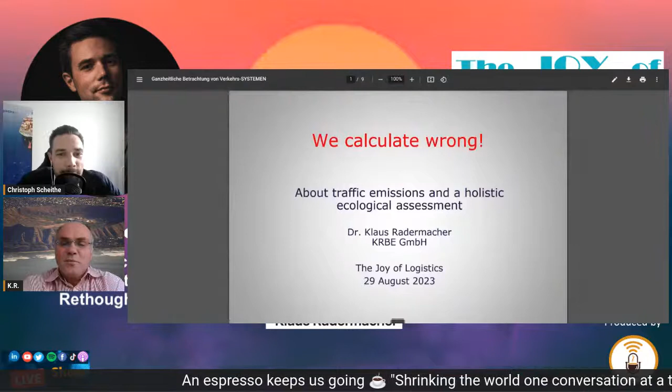This is the headline, the main title: I always claim we calculate wrong. We calculate completely wrong when we talk about emissions - traffic emissions in particular, or mobility emissions - because a holistic ecological assessment takes much more than just looking at the drive energy or propulsion energy.

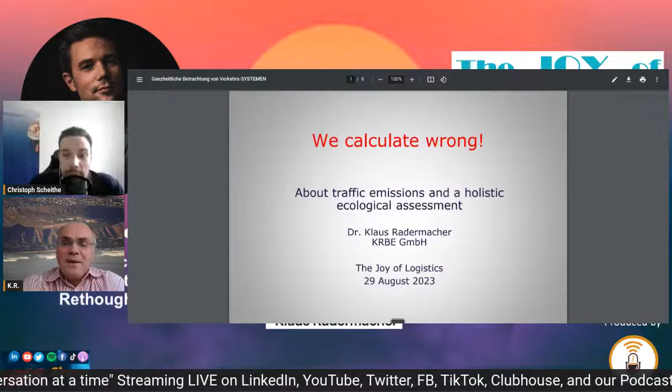This is what we see on the next slide. If we look at transportation or mobility systems in general, we see that there are four primary transportation systems: it's the railroad, it's the road - cars, it's aviation, and it's shipping. These are the four main systems.

Each of these systems requires not only a vehicle and the drive energy or propulsion energy, it also requires a very specific infrastructure. This is pretty much the idea I developed a couple of years back, to come up with this matrix or table. The infrastructure can always be subdivided into a node infrastructure, a path infrastructure, and a control infrastructure. All four systems need that and have that.

The node infrastructure is where we start and terminate any kind of transportation process. When we go by train, we start in a station and the train stops in a station or we get off the train. For an aircraft, it's the airports. And for shipping, it's the ports, the harbors.

For the road, this is where most people have difficulties thinking about node infrastructure. Where is that? There's no designated port for cars - no, there isn't, but there's parking space. Every transportation starts with a parked car and ends with a parked car. So the parking space, whether in a garage, on the street, or in your private driveway, this is the node infrastructure for the road transport system.

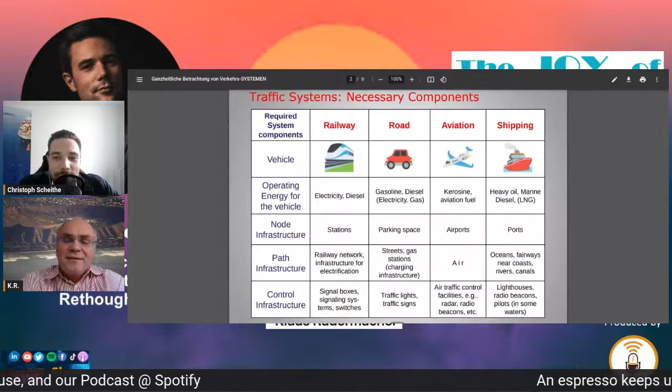Then the very important part is the path infrastructure - that's everything we need between nodes. Because for land-based transportation, railway and road, we have to build this infrastructure - railway networks and the infrastructure for electrification if we want electric trains. For the road system, for cars, we need streets, gas stations, and charging infrastructure so we can keep going.

And now the very interesting part is in aviation - the path infrastructure is air. It's nothing but air.

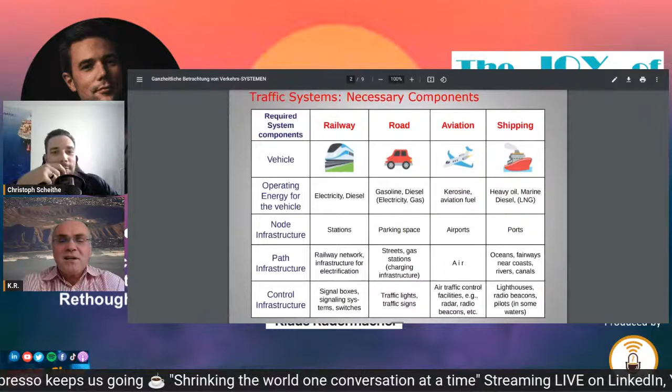We do not need anything but air between two airports, and the air is always there. It does not need to be built, and there is no maintenance required. Somewhat similar in shipping, especially in international oceans—the oceans are there. They do not need to be built, and they do not need to be maintained.

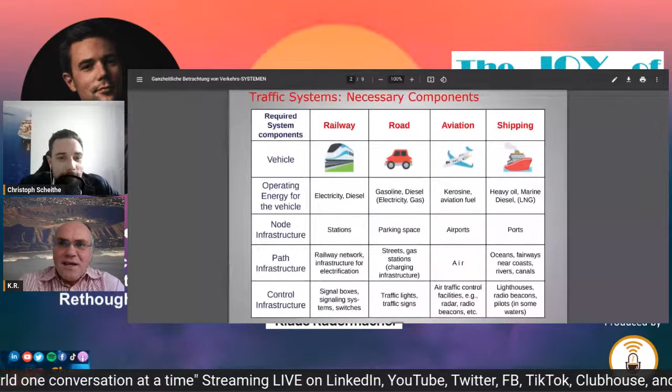Of course, if we are on rivers or even canals, these have to be built, they have to be taken care of, they have to be maintained in order to be deep enough. But for international sea shipping, the oceans are just there. So that's the path infrastructure.

And then the last part, the control infrastructure—very important. Most people do not really think about that. Control infrastructure ensures that several participants in the same system can provide transportation at the same time in a secure and controlled manner, so that cars don't bump into each other, so we have no accidents, so trains don't collide with each other. That is the control infrastructure.

In railway systems, it's the signal boxes, the signal systems, the switches. On the road, it's the traffic lights, the traffic signs. In aviation, it's everything that has to do with air traffic control facilities. And in shipping, yes, there are some lighthouses, radio beacons. Sometimes we even have pilots in some waters, when ships operate in harbors and ports. These pilots actually are part of the control infrastructure.

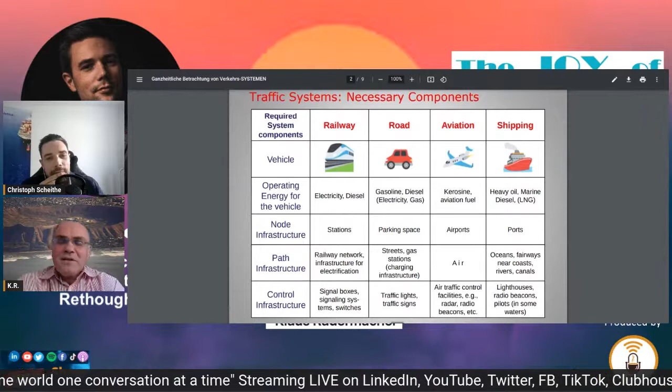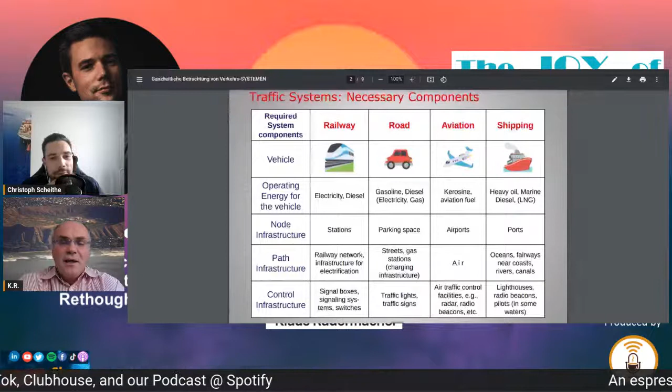But this understanding is really important when you want to have a holistic view of the system. And in order to determine, for example, the carbon dioxide emissions, it is completely insufficient to only look at the operating energy. You have to take the whole system into consideration. What we will see on the next slide is that path infrastructure in particular, but to some extent also node infrastructure, is very intense with regard to certain materials.

This is just a collection of different photos. You see node infrastructure and path infrastructure—I won't go into the details, you can all see that right away. We see train bridges, electrification, and a parking garage. What we have to keep in mind is we see enormous amounts of steel, of concrete with cement, very often a lot of copper when it comes to electrification and catenary wires, but we also see aluminum. All these materials have a dramatic footprint when it comes to CO2.

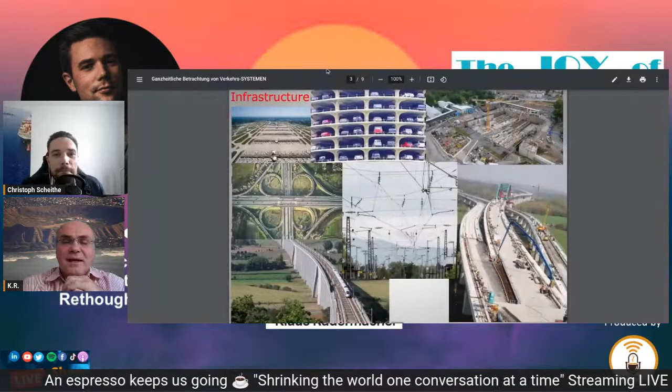That is what we have on the next slide. So here I give you just some numbers. The production of 1 ton of steel generates 2 tons of carbon dioxide just in the coke plant and blast furnace. And just for the railroad track, the rails that trains run on, for 1 kilometer of railroad track we need 120 tons of steel—that's just the track. There is no other steel involved that might be needed for the slab track or anything else.

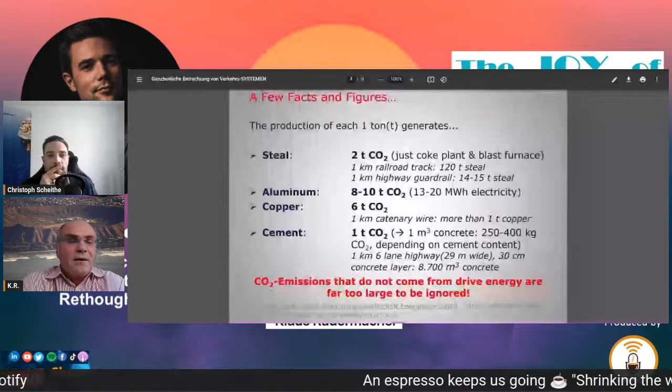And similarly, on a highway, 1 kilometer of guardrail is anywhere between 14 and 15 tons of steel, and 2 tons of carbon dioxide per ton of steel is quite impressive when you look at these numbers. Speaking about aluminum, it gets even worse.

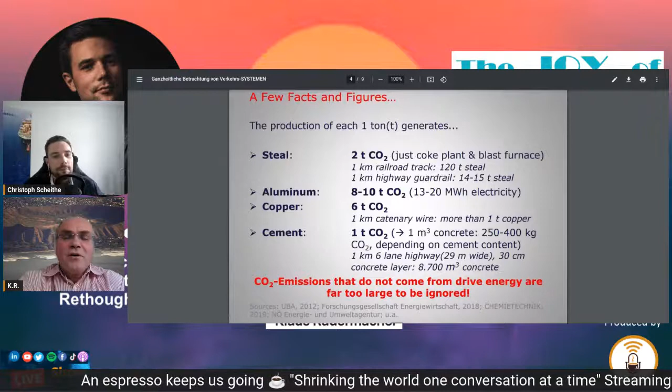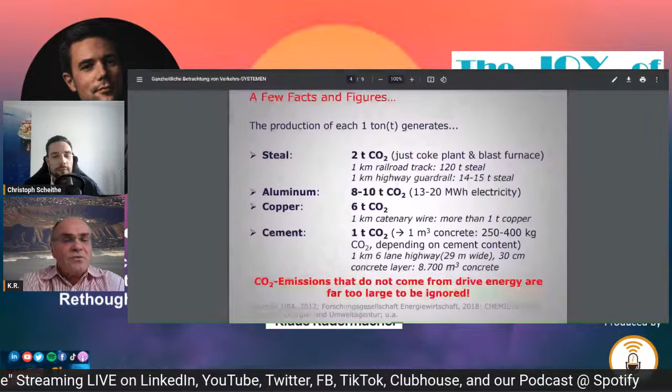Aluminum—I have to admit the number 8 to 10 has quite a range, and that depends on the carbon footprint of your power generation for electricity, because it's very electricity intense. But for 1 ton of aluminum, on average on this planet, we have 8 to 10 tons of carbon dioxide emitted somewhere. Copper is 6 tons or even a little bit more.

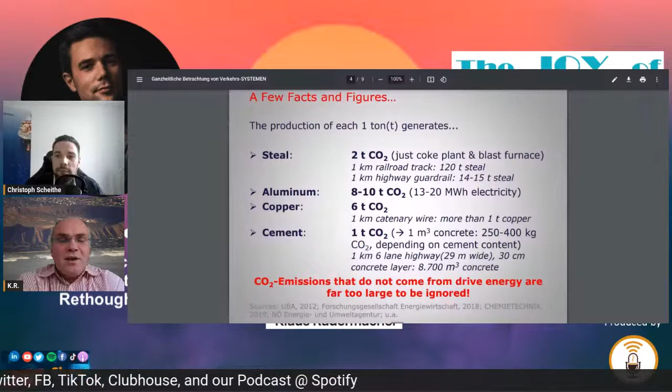And once again, to give you an impression—that catenary wire I already talked about, which hangs above a railroad track, 1 kilometer, if the catenary wire is like it usually is in Germany or in Europe, it's about 120 square millimeters. And if you take 1 kilometer of that, the weight of copper needed is more than 1 ton. To produce 1 ton of copper from copper ore, you emit more than 6 tons of carbon dioxide, and that does not even include the energy required for making the wire—it's just the pure metal.

Cement: 1 ton of cement comes up with 1 ton of carbon dioxide, and depending on how much cement is in the concrete—and you need a lot of concrete when you build roads, especially when it comes to building bridges or even tunnels for trains—we have, for 1 cubic meter, the usual measurement for concrete, anywhere between 250 and 400 kilograms of carbon dioxide.

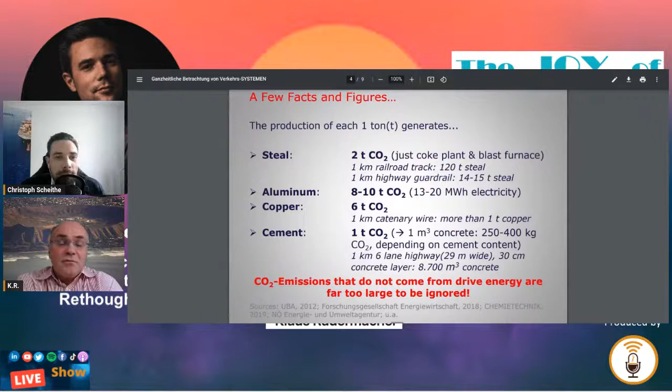My main message is that the carbon dioxide emissions that do not come from the propulsion energy, the drive energy, are far too large to be ignored. That is what we always have to keep in mind. And of course, the question is to what extent can we utilize the infrastructure that was once built. But we have more information on that on the next slides.

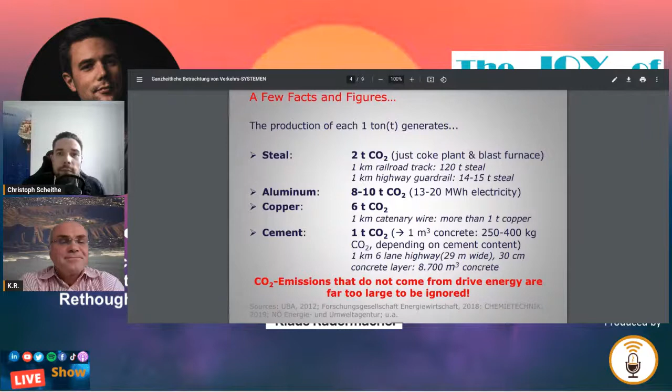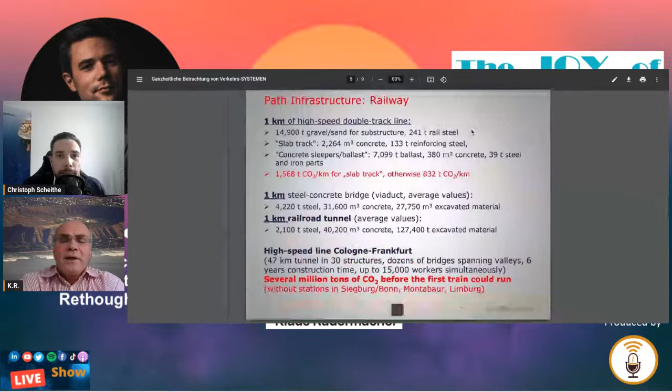I hope this works, keep going. By the way, I just realized there was quite a mistake on that slide, because steel is spelled with double E, not with EA. But I guess you all realized that was a mistake.

So getting back to the railway infrastructure, because at least in Germany and many European countries, taking the train is considered to be very eco-friendly. That's not even true if you only look at the drive energy, but it becomes even less true if you look at what it takes to build the infrastructure.

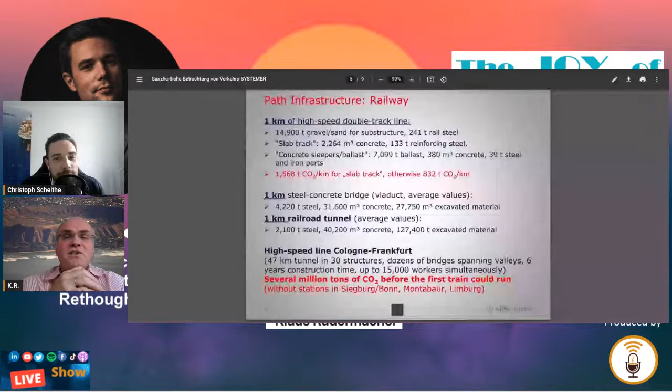For 1 kilometer of high-speed double-track line, so two rails next to each other, one for each direction, you need actually 4 lines of steel rails. The double-track high-speed line requires almost 15,000 tons of gravel or sand for the substructure, and on top of that 241 tons of rail steel.

And if the rails are laid on a so-called slab track, a solid concrete layer where you put the rails on, you need almost 2,300 cubic meters of concrete and 133 tons of reinforcing steel in that slab track.

And in the more classical construction, where you have concrete sleepers on a bed of ballast — ballast being another kind of gravel — you need more than 7,000 tons of ballast, 380 cubic meters of concrete for the concrete sleepers, and then 39 tons of steel and other iron parts to fix the rails on the sleepers and all that.

So this means, if you just look at the CO2 emissions from the production of this material, we're close to 1,600 tons of carbon dioxide per kilometer on a slab track, and about half of that, or a little more, if you go with concrete sleepers and ballast.

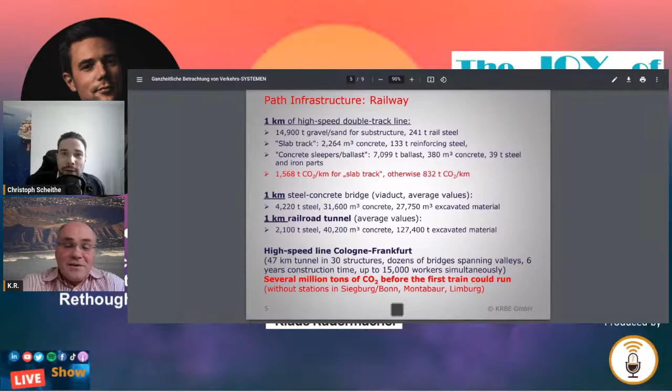Okay, but let's go to the next slide, because this was a very good remark, and I want to have more time for these comments. Let me just pull this up here. There we go.

What I'm saying is thinking mobility differently means we have to reshape our ideas about mobility. For example, what is not really helpful is the form of public transportation as it is provided today. In very large cities, it certainly makes sense to have subway trains running, but in many other cities, if you look throughout the day, most buses, trains, subway trains, or streetcars are not even 20 to 30% filled. They simply do not have the load that would be required to run them efficiently.

We have to think much more about mobility as a service platforms that provide mobility to me when I need it, rather than having to own my own car, which sits in my driveway for 23 hours on average each day and is only used for 1 hour. And when I use it, in most European countries, it's only occupied on average by 1.5 persons - such an inefficient use of individual mobility of cars. So mobility as a service platforms are very important.

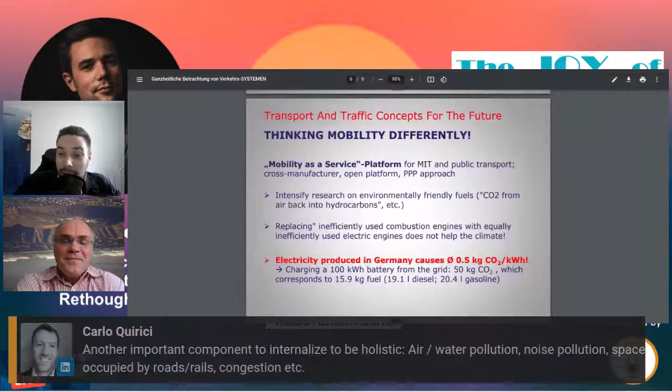But before I move on, I have a quick comment from the audience I want to pull up. Carlo Quirici - I hope I pronounced this correctly, Carlo - says: another important component to internalize to be holistic: air and water pollution, noise pollution, space occupied by roads, rails, congestion, etc. So I think he's pointing out those external effects.

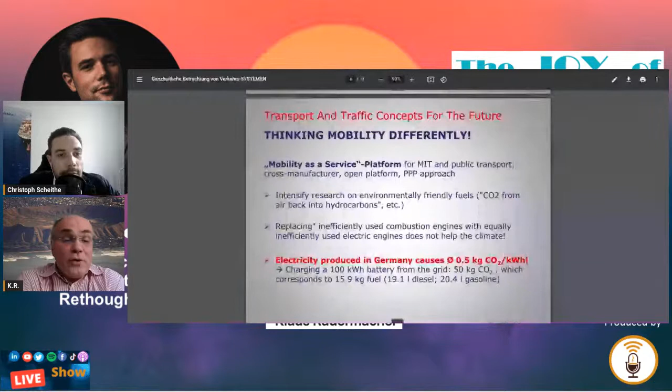Very good, Carlo. I can say you're absolutely right, there's much more than just carbon dioxide. I focused my research on carbon dioxide and then extended it beyond that. Of course space is an issue, noise pollution and vibrations are an issue as well. Water, I have not really looked into in detail, but battery production in particular is very water intense. There are other aspects than just ecological ones - there are economical aspects, and aspects of reliability, resiliency, and so on. If you look at the survey I wrote, published about 2 years ago, you will see that quite some of these aspects, and some more, are at least briefly addressed. I've also written several articles published in newspapers or electronic media that sometimes address specific parts of what you just mentioned. But for today I thought I'd focus on the CO2 topic, because we simply don't have sufficient time to discuss everything that is important. But you're absolutely right, this holistic thinking is a very broad field.

Excellent. I see more comments popping up, let me bring in two more. John again: the general idea is that most battery packs used in the EV market can't be recycled and must be disposed of in landfills. Yeah, which leaves us again with nothing. Yeah, I have nothing to add to that.

There will be a lot of surprises to many people once we have the first generation of cars that are beyond the lifetime of their batteries. People sometimes have to learn it the hard way, depending on where you are. In California, for example, I spent a lot of time there, having worked there as well in my previous professional life.

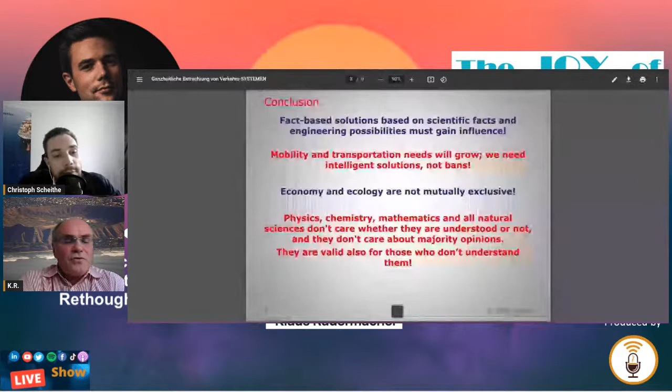I mentioned I've been spending quite some time in Silicon Valley working there. And whoever knows that 101 from San Francisco Airport down all the way to San Jose knows it's a nightmare. But once again, we're using it completely inefficiently because every single car only has one person in it. That is what makes the MIT, the motorized individual traffic, so inefficient.

And even the carpool lanes invented in California, as far as I know, even if they force you to put 2 or 3 people in a car, that does not help. As long as everyone is kind of forced to purchase a car, use it for 15 minutes or half an hour to go to work, then put it on a parking lot where it sits for 10 hours, and then use it again for 30 minutes to go back home, and it sits there again for 10 hours—that is a completely inefficient use of resources.

Today, not 20 years ago and not 30 years ago, but today we have much, much smarter ways of utilizing the resources. And that is what we absolutely have to get into our mobility systems.

And if I may—yeah, if okay, go ahead, Christoph, please.

I'm okay, talking too much. No, you're good, you're good.

I want to add, especially on the second point: we need intelligent solutions, not bans. That's something that sparked my eye because I read earlier this year that the Californian committee is ruling for banning all combustion powered trucks from Californian ports, essentially Los Angeles, Long Beach, and Oakland. Although the port of LA is much bigger, no one answers the question: how is this transportation need then replaced? At the end of the day, LA is such a busy port with so many containers coming in and going out, some sort of vehicle will have to move it. That's oftentimes fully ignored, and I think this has the potential to really backfire to everybody involved.

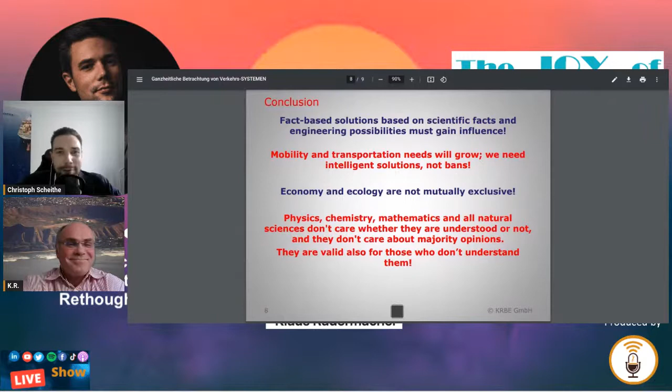Okay, next slide. I think we're pretty much through already. I think the next one, keep going.

But that is pretty much what I wanted to share with you using the slides, and I'm very happy to discuss with you now. If you have any other specific questions, I might have a backup slide, and then I can still provide that. Fantastic.